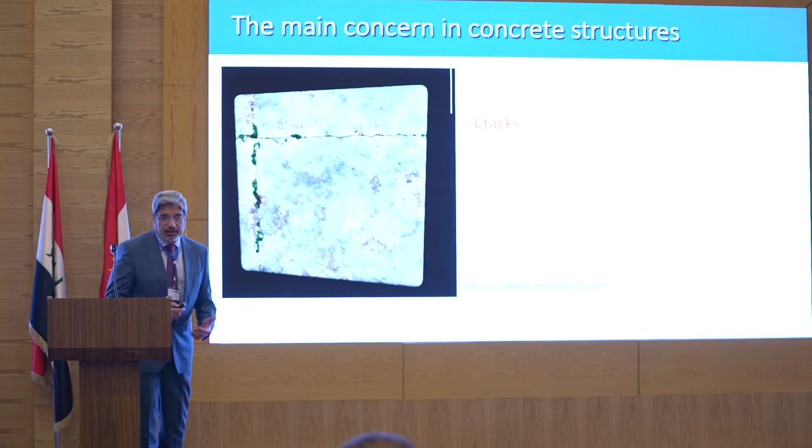I will talk about a code. It's not well known like the ACI 318. It is the 350. Why we need such code, especially in Iraq, when building our infrastructure facilities? Maybe most of you are engineers and dealing with concrete as designers or constructors and so on. Always there is a concern, which is cracks.

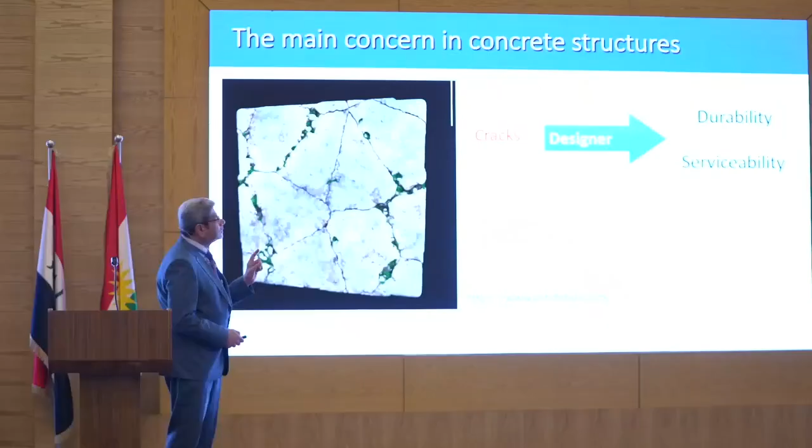Cracks are important to be controlled for the designer to satisfy two requirements: the serviceability requirements and durability requirements. And this is for ordinary buildings. But for environmental engineering concrete structures, the function will be how to keep the liquids and water, etc., inside those types of structures. So the cracks will be effective for the function.

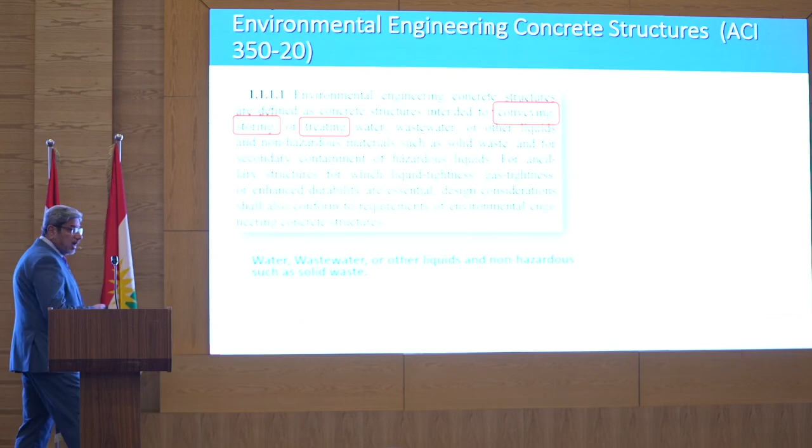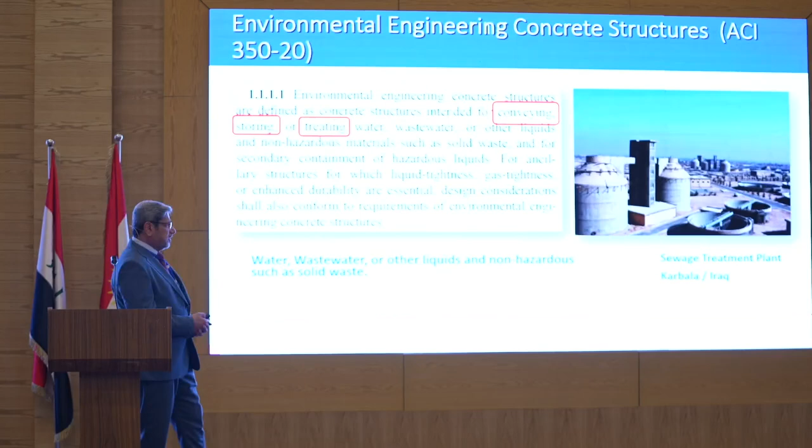But let me define first the meaning of environmental engineering concrete structures. I will use section 1.1.1 from 350-20. It is those facilities used for conveying, storing, treating water, wastewater, or other liquids, and so on. One of the examples is this treatment plant, which was constructed recently in Karbala, and I think there are a lot of such facilities in the Kurdistan region.

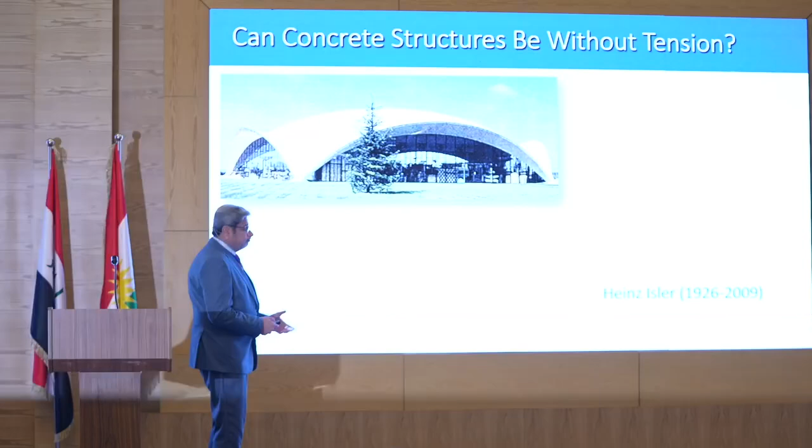So let me return back to the history and our traditions, because I also have interest in cultural heritage. So can we get rid of the tension? Because cracking is always caused by tension. There are a lot of attempts to have structures without tension. One of them, this Swiss structural designer, who passed away in 2009, started to invent such non-tension structures.

And we returned back to the history and found that the first sketches of Isler were maybe inspired by the Ctesiphon in the middle of Iraq, and the large catenary shell, which is maybe the largest catenary shell in the world, the same shape with a minimum potential energy, as you know.

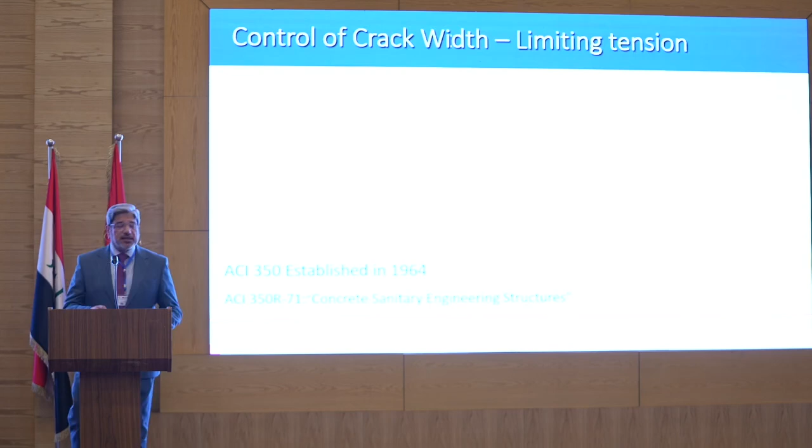So ACI started to deal with such concrete structures, but the name at the beginning was sanitary engineering structures. And the first report was published in 1971, after many years of work. The main idea is how to control the cracks, because we cannot have no-tension structures, so cracks always exist. The alternative way is to control the crack, which means limiting the width of cracks.

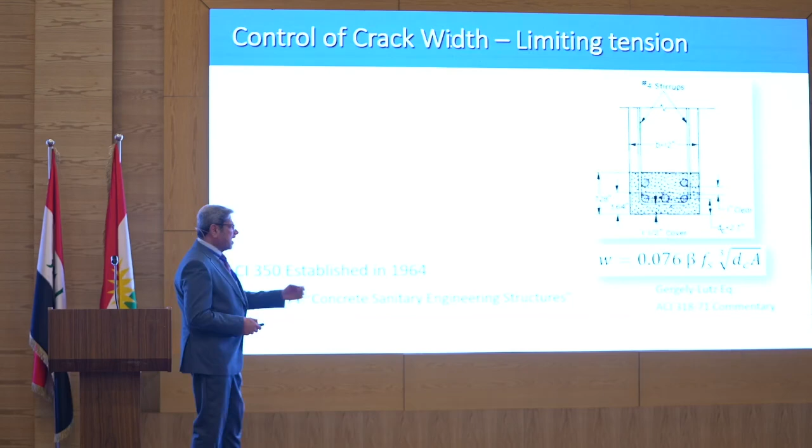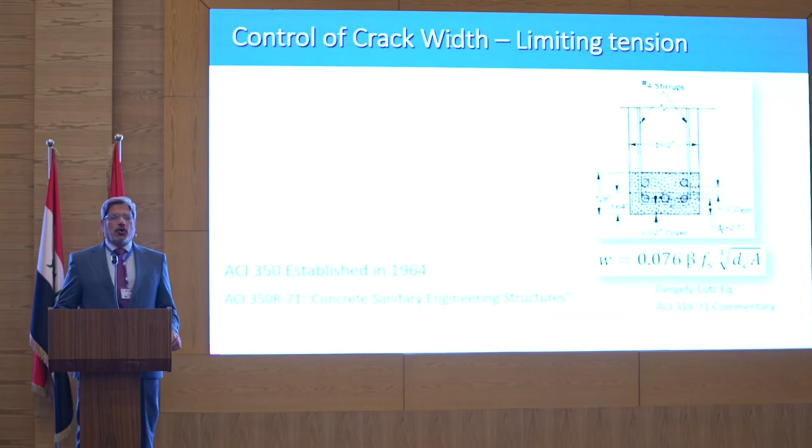The well-known equation of crack width, which is Gergely-Lutz, used by ACI 318 in 1971, was adopted in this report, and you can see there is a direct relation between W, which means the crack width, and the steel stress. Because as you know, we bring the steel to resist the tensile stresses inside concrete structures. And the working stress method was used by the report, because maybe it was the first time in ACI 318 to use strength design, so it was not adopted by this report.

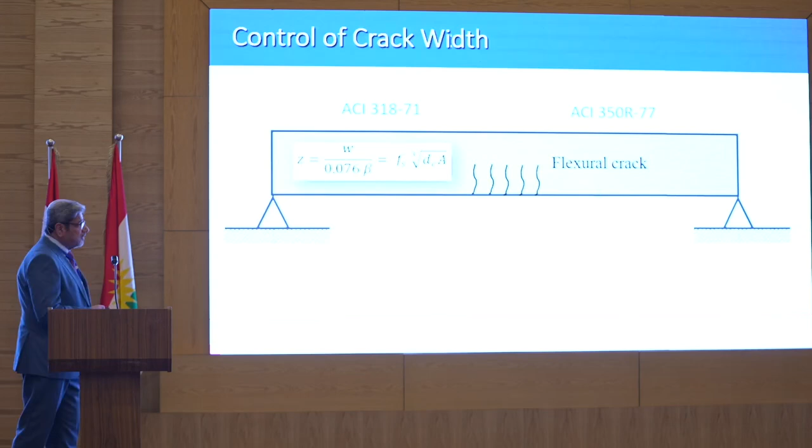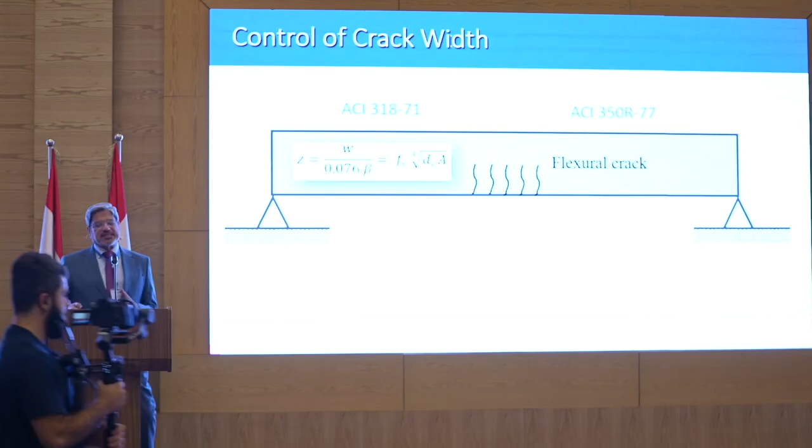Later, before talking about the other report of 1989, in '77 this Gergely-Lutz equation was adopted by ACI 350, and we will compare the difference between crack control in ordinary concrete structures and, I can say, sanitary concrete structures.

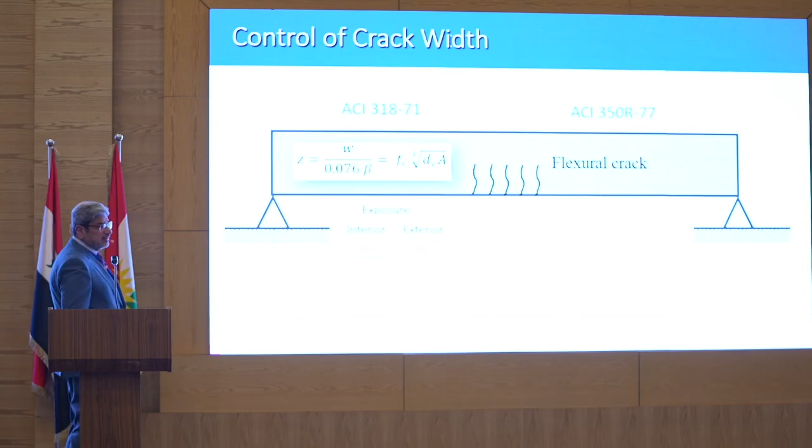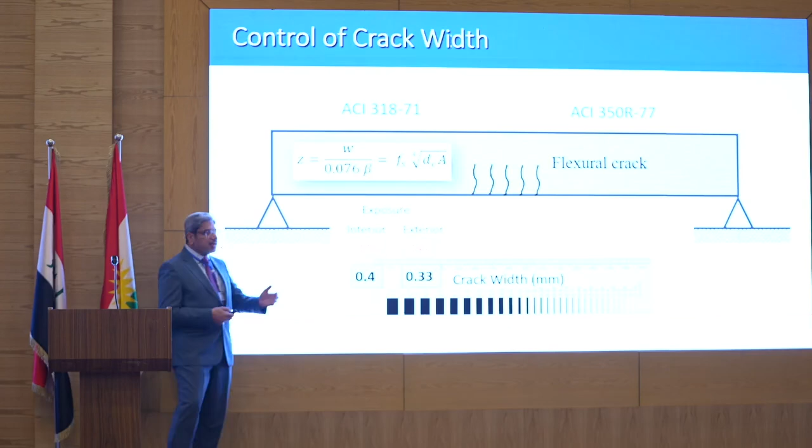So if we now take ACI 318 of 1971, we have two exposures in crack control, interior or exterior, and then we have the Z factor, not directly dealing with the width of the crack with the W parameter. For interior, the limit value is 175, and for exterior it is 145, which means if we measure the crack width by crackometer, the maximum crack width allowed is 0.4 millimeter for interior, like columns and beams in the interior space, and for exterior structural members it will be 0.33.

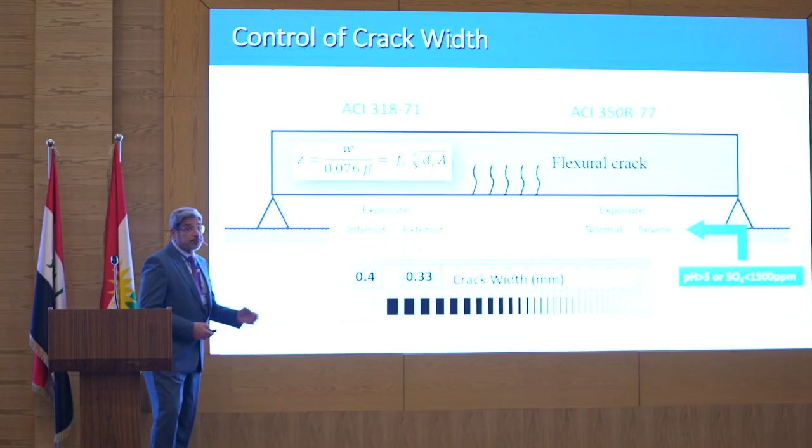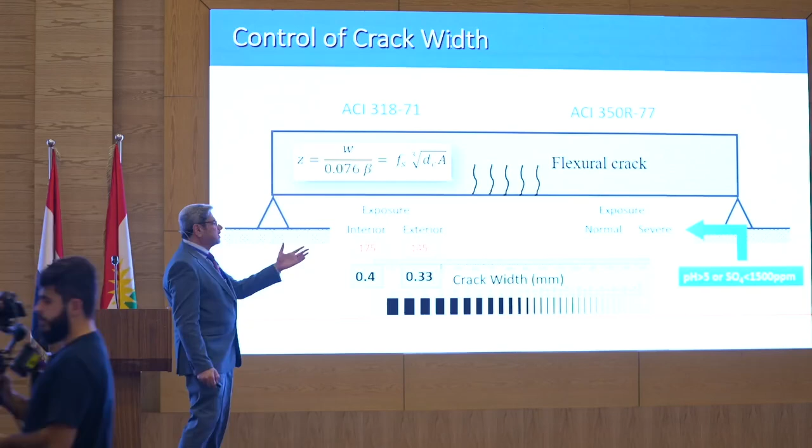But for sanitary engineering structures, the thing is different, because the exposure is not interior and exterior. It's not as simple as that. It is normal and severe. The way to measure the difference between normal and severe exposure is related to the concentration of sulfate inside the material contained in such structures, for example sewage or raw water, and so on. Or use the pH parameter to see if it's alkaline material or not.

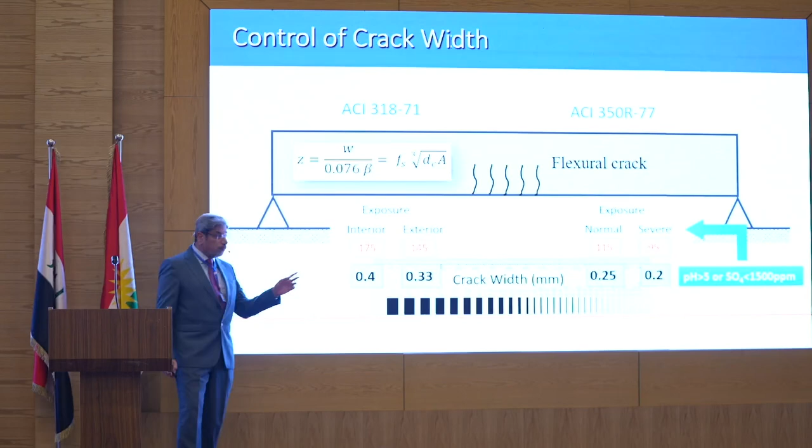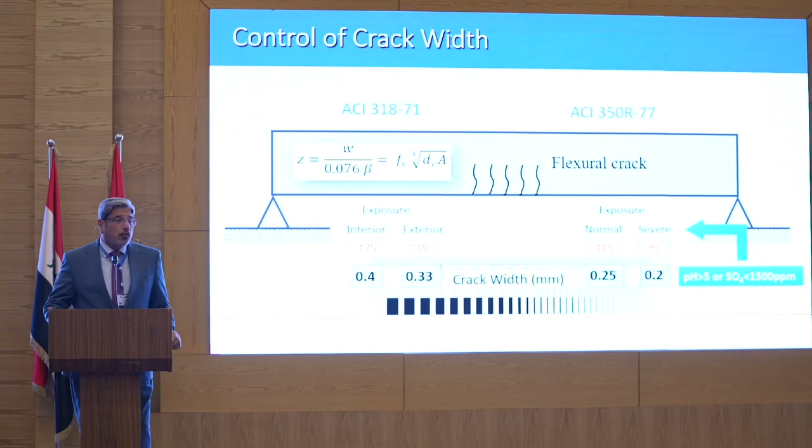So let us compare the values. We will see that the crack width is limited to 0.25 in normal exposure, and only 0.2 millimeter in severe exposure. Let us now imagine what the steel stress will be, because as I said in the beginning, we cannot avoid tensile stresses, so let us limit these stresses. As you know, the tensile stress will be carried by the steel only. So the steel stress will be 0.6 Fy here, but for sanitary engineering structures it will be limited to 0.3 to 0.45, depending on the type of exposure.

Later, another report was published in 1983, and it was time to adopt the strength design method, because we had 10 or more than 10 years since the ACI 318 adopted such philosophy in the design. This is the main equation of the strength design method.

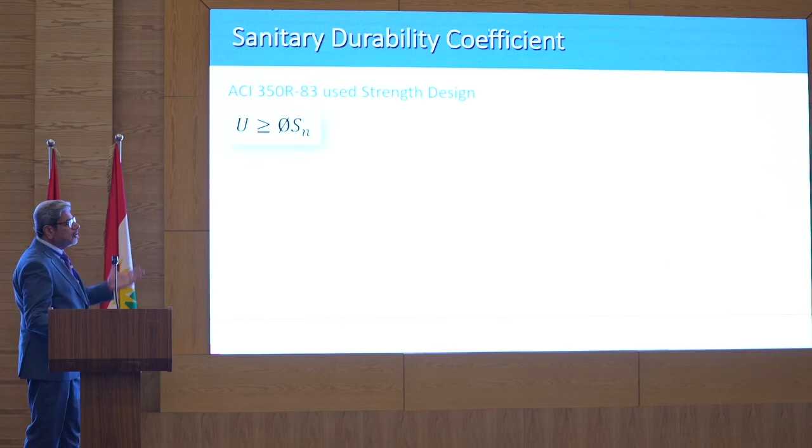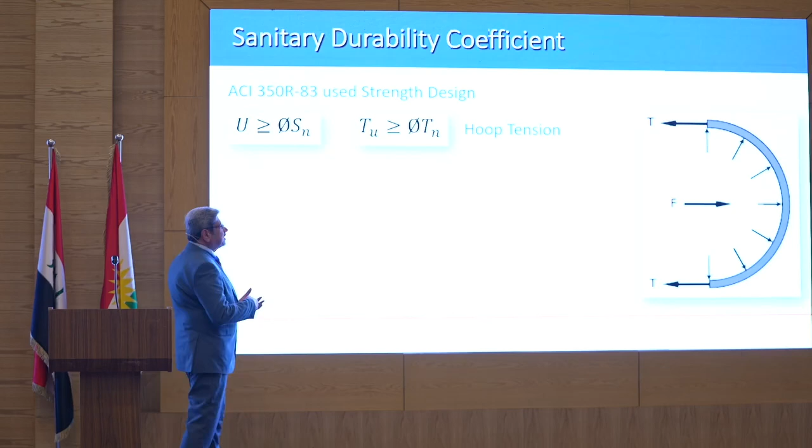If you think about how this report is familiar with the same philosophy of controlling stresses or tensile stresses inside the structures and then limiting the crack width, they used to equalize the two forces calculated by ultimate and service load, or the allowable stress method. Let us explain this in an easy way.

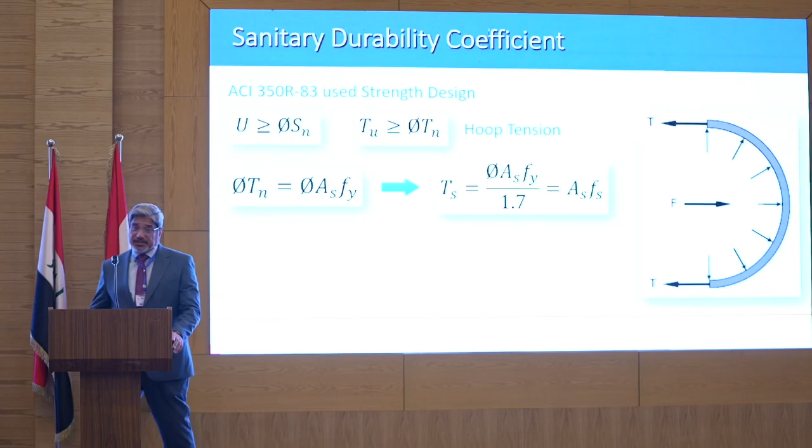Consider this circular tank. As you know, the main dominating factor in the design here will be the hoop tension, T. If we use the ultimate strength method, it will be this equation. If we use the allowable stress method and equalize both forces, we find this equation. Now consider one of the exposures, where the crack width is limited to 0.2 millimeter in severe exposure, and we will see that both equations are not equal.

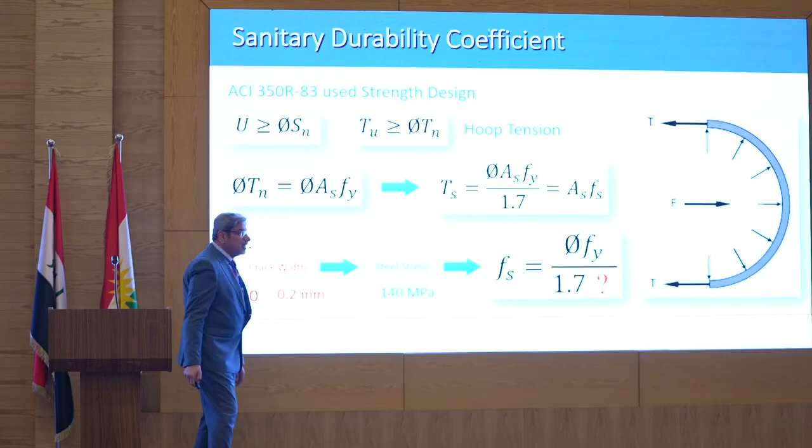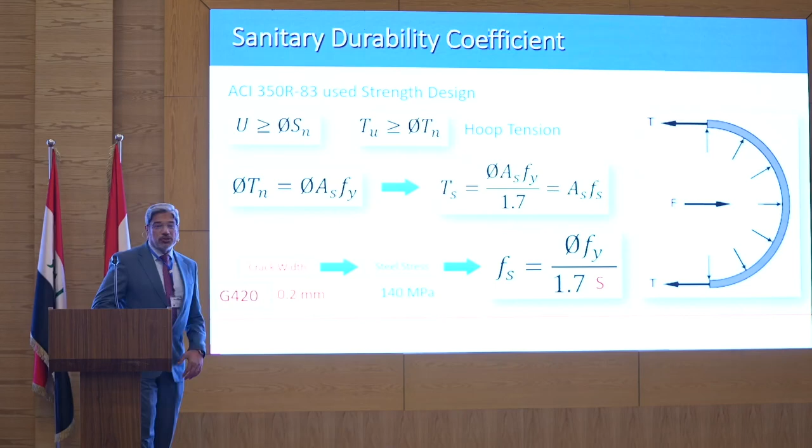We need another parameter to equalize those equations. This parameter was named the sanitary durability factor at that time. In other words, we should increase the loads more to have less stresses, and then less crack widths. This is the main idea.

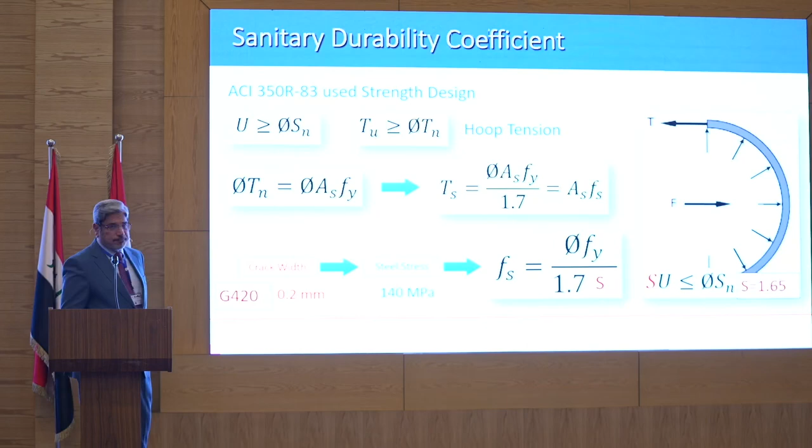This report at that time used a constant value for this durability factor. For example, for hoop tension or direct tension, it was 1.65. Later, for flexure, the same idea applied but with another equation. I have no time to go into it.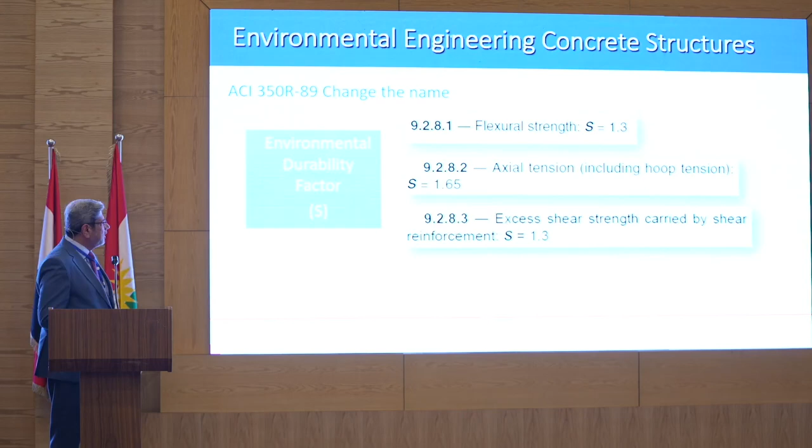But in the report published in 1989, this factor changed its name from sanitary durability factor to environmental durability factor. This is because the whole report title was changed from Sanitary Engineering Concrete Structures to Environmental Engineering Concrete Structures.

As you can see, it is clear that the constant value for this factor was still adopted at that time, because this idea was developed in another way.

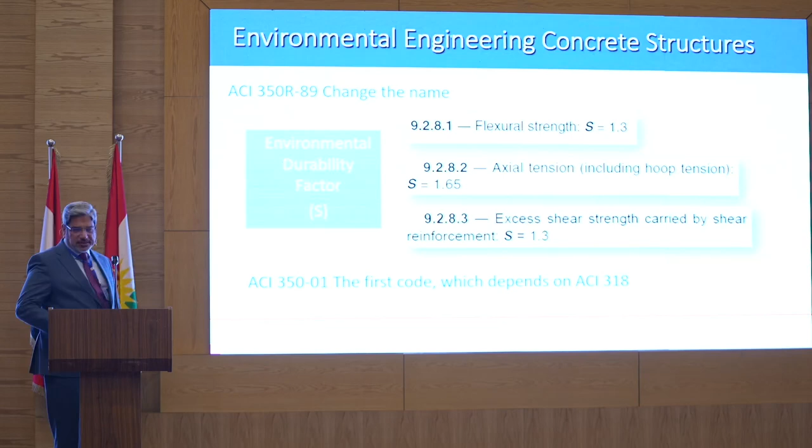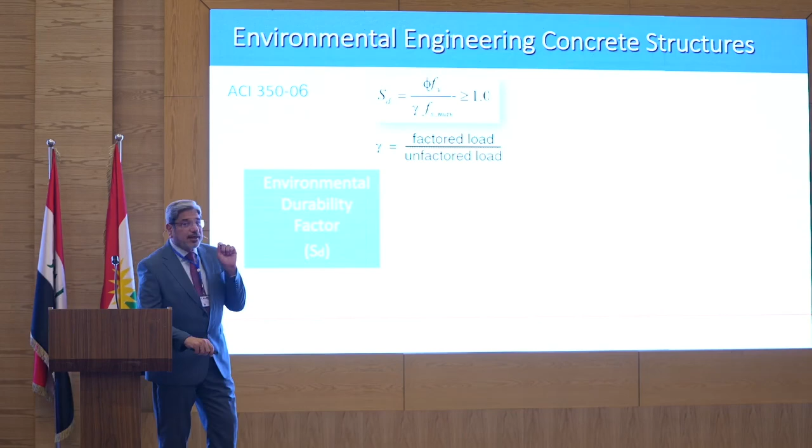The first code in this new millennium was published in 2001, with the name ACI 350. Later there was a code in 2006, but the main common idea between them is that the durability factor was calculated by an equation, not constant values. This equation has many parameters, like phi and f sub y and so on, but the main parameter, I would say, is the maximum steel stress, which defines the maximum crack width allowed in the design.

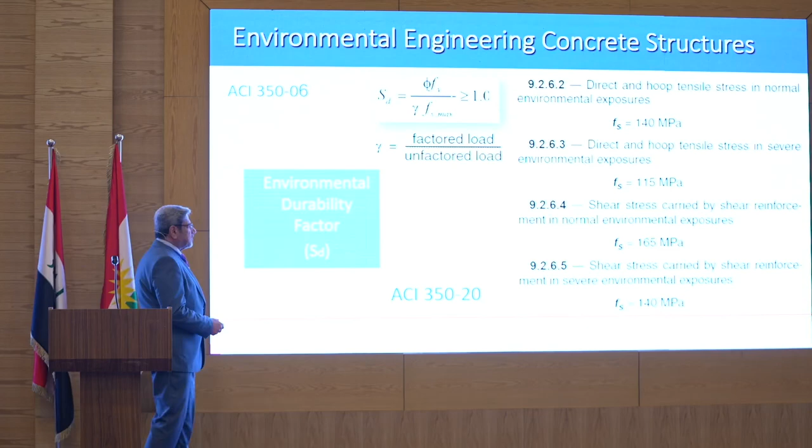Constant values are used for hoop tension, but for flexure we see other values and another way to calculate this. The code published recently in 2020 adopted the same values and the same equation with the same symbols, but for flexure, you can see there's been a lot of change. It is a huge change in adopting the main philosophy of how to control or calculate the crack width.

In the beginning, as I mentioned, the code or report adopted the Gergely-Lutz equation. But when ACI 318 moved to another equation, written or published by Frosch, I think in the late 90s, the code ACI 350 also followed this new idea and equation.

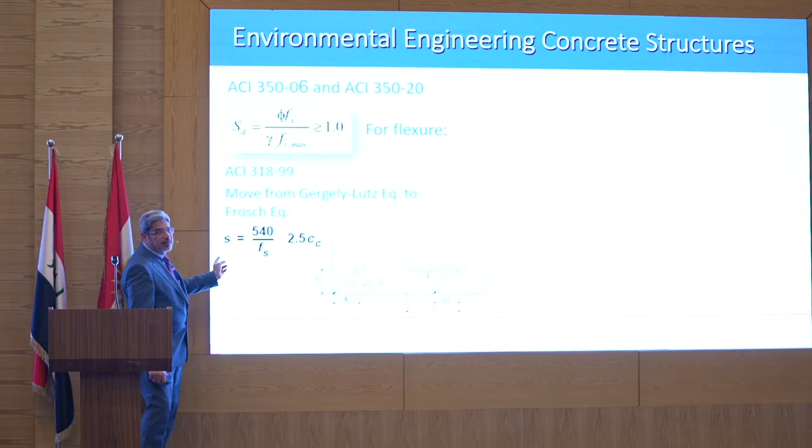I think all the engineers who graduated earlier studied the Z factor, but new engineers now study only the maximum spacing in the ACI code, how to calculate maximum spacing between bars to control flexural cracking. However, the FS max now has new equations dependent on the Frosch equation.

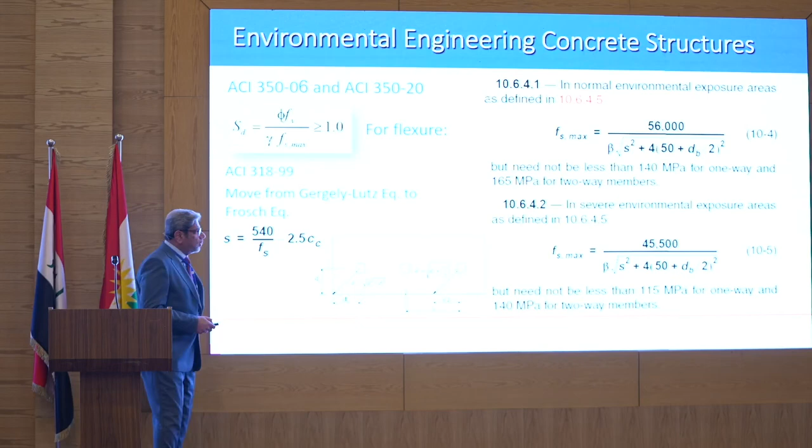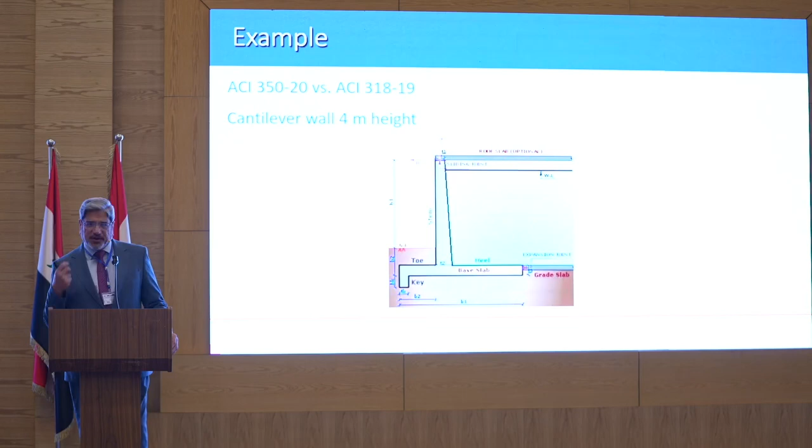To show you the difference in engineering sense, we are engineers, we want to deal with numbers, and the output is very important for us. Let me consider now an example, a virtual example.

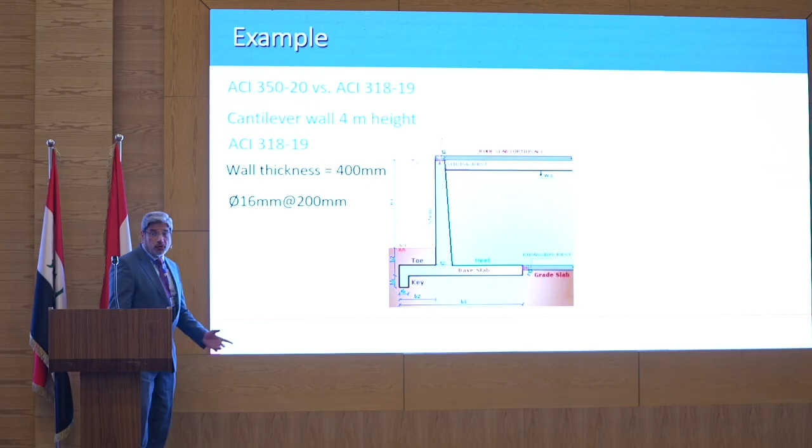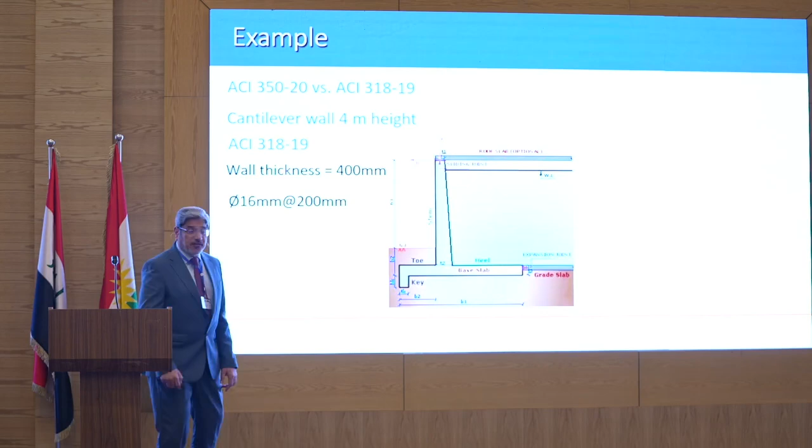We have a water tank designed as a cantilever with a fixed base. I will use ACI 318 to design this cantilever wall of the tank. The wall thickness will be 400 millimeters, reinforced with bars of 16 millimeters each, spaced at 200 millimeters. But if we think about durability, function, water tightness, and so on, we should use ACI 350, and you will find these results.

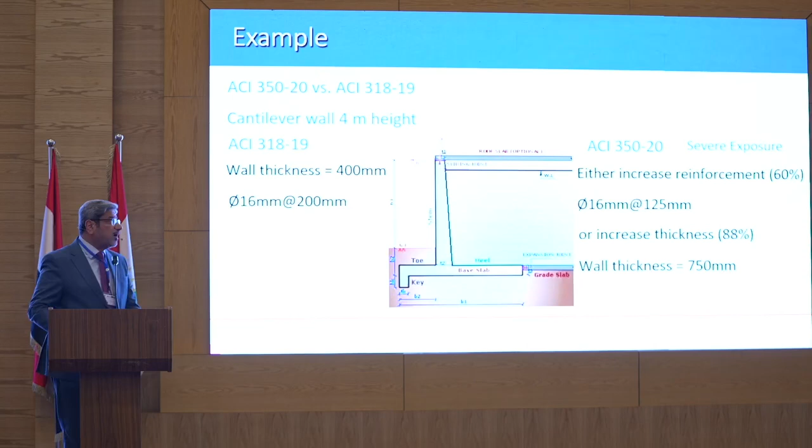So to control crack width, you have to increase the wall thickness by 88%, or you have to increase the reinforcement by 60%. This is the difference between ACI 318 and ACI 350.

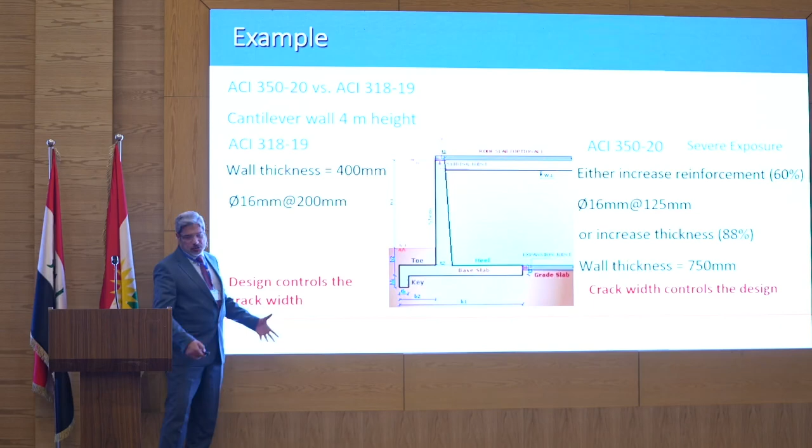So I can say, this is my own sentence, not from the code, that in ordinary design, the design controls the crack width. This is familiar, a common sentence. But I can add that the crack width will control the whole design in this type of structures.

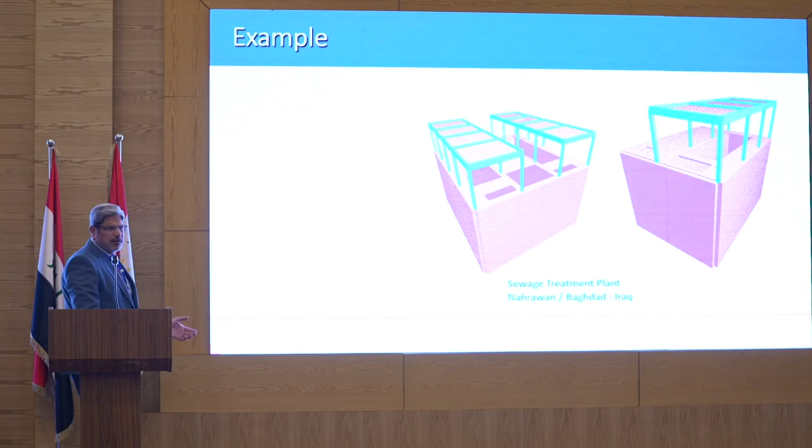Recently, one month ago, I checked the design of some facilities in a pumping station at Nahrawan, a treatment plant at Baghdad. Those facilities were designed, I think, in 2014 using the old ACI 350. But I used the new ACI 350 to find if the design is good or not, or must be checked. I found this.

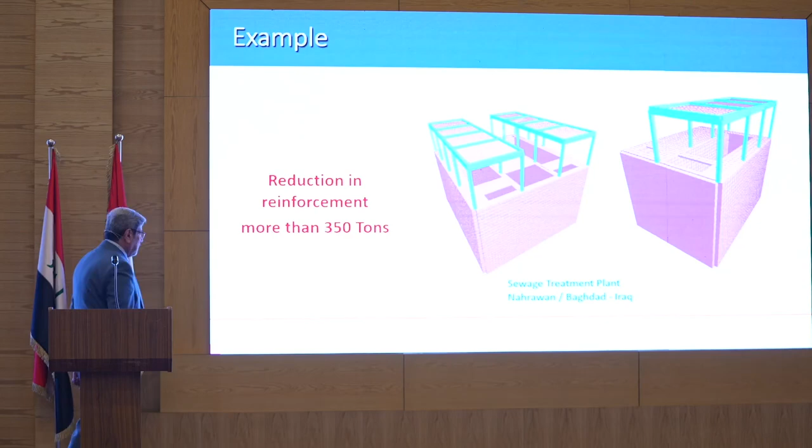When I use the new ACI 350, there's a reduction in the reinforcement of about 350 tons, which made some problems between the contractor and the client, because there will be change orders about the price and the contract and so on. But this is a strange thing. Why is the reinforcement reduced in those pumping stations?

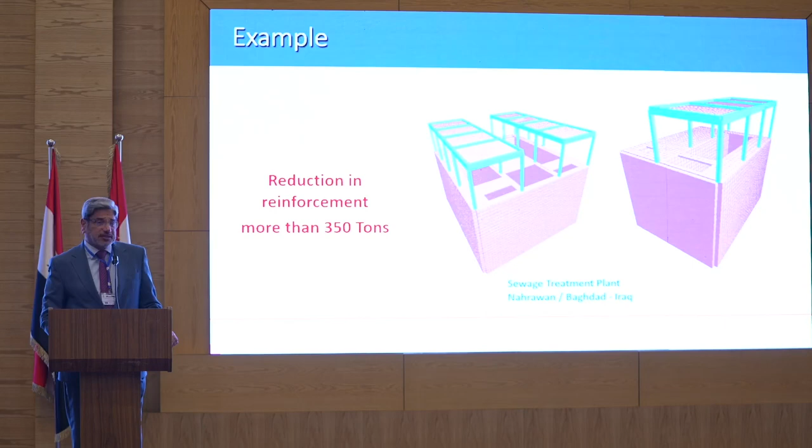I will tell you. Up to now I was talking about one type of cracks, the flexural crack. But we have another type of cracks which is very important: the shrinkage and temperature cracks. Yes, it happens at early ages of concrete, but really it's a bad thing for everyone dealing with concrete - the contractor, the designer, the client, and so on.

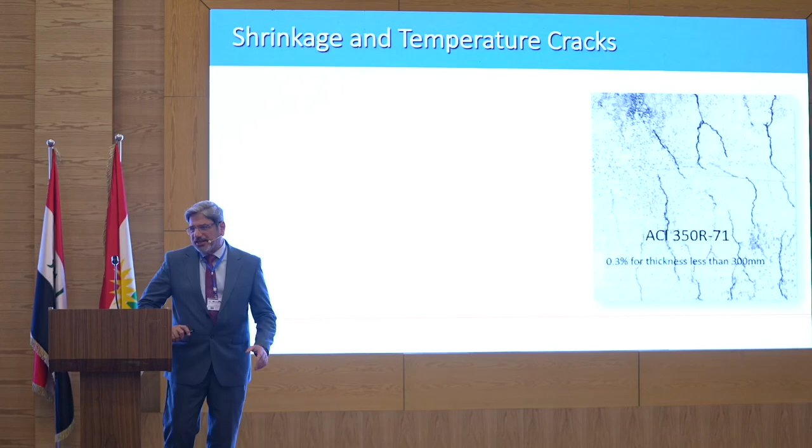When, after removing the shoring and the forming, they saw a lot of cracks, crazy cracks, as they mentioned.

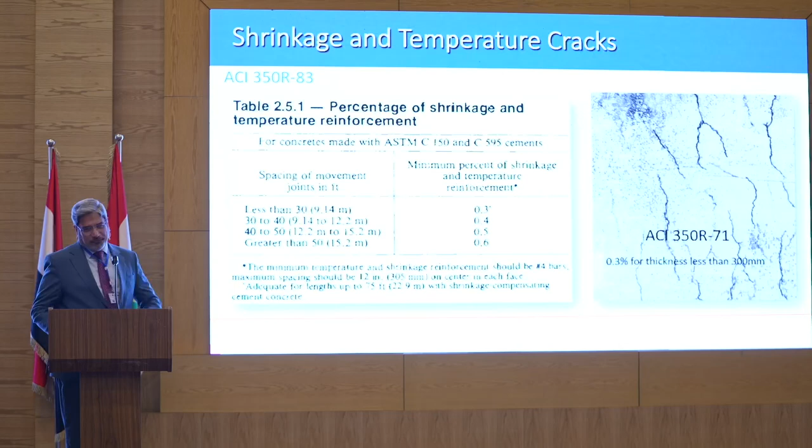At the beginning, the ACI 350 reports used those ratios as a minimum. We called it minimum reinforcement - for simplicity I will call it minimum reinforcement, to avoid shrinkage and temperature cracks. So the maximum is 0.006 and the minimum is 0.003, and the minimum of this table is larger than the minimum in ordinary walls, which is 0.0025.

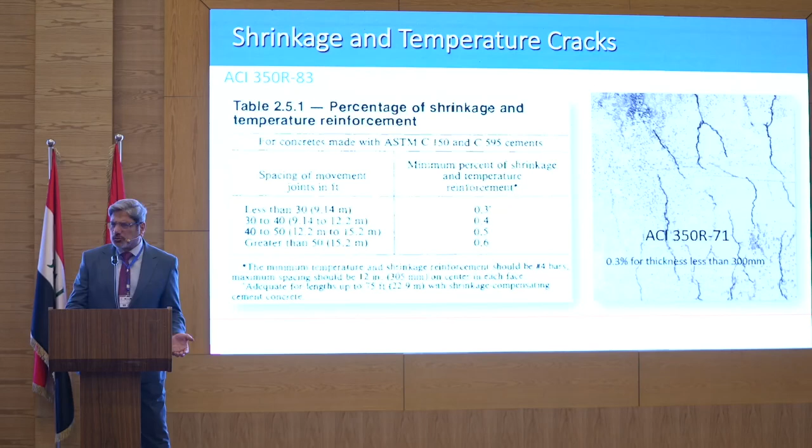Later, this was improved in another graph and so on, and in the report they added sketches for the contraction joints, because it is important to control the shrinkage crack not only by reinforcement, but also by using contraction joints, as you know.

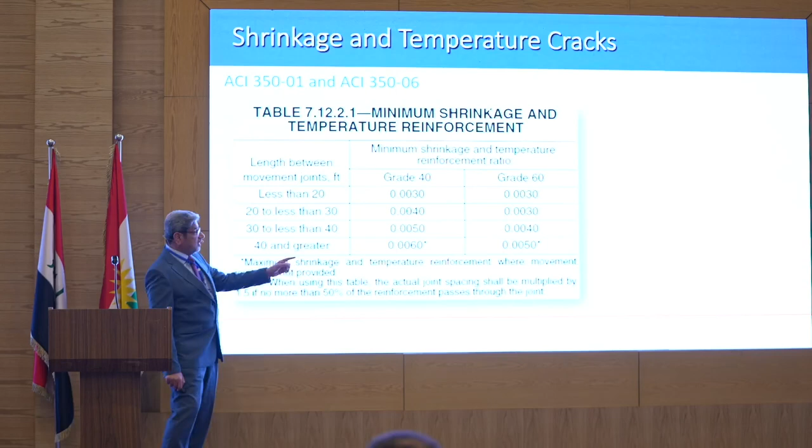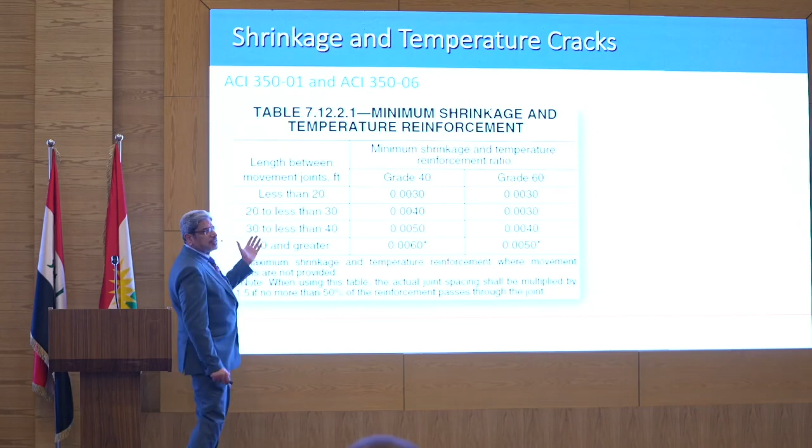The code, or the last code before the recent code, let me say like that - now there are two types of steel reinforcement, grade 40 and grade 60, and you can see that the maximum secondary reinforcement is 0.006, but it depends on the distance between the contraction joints.

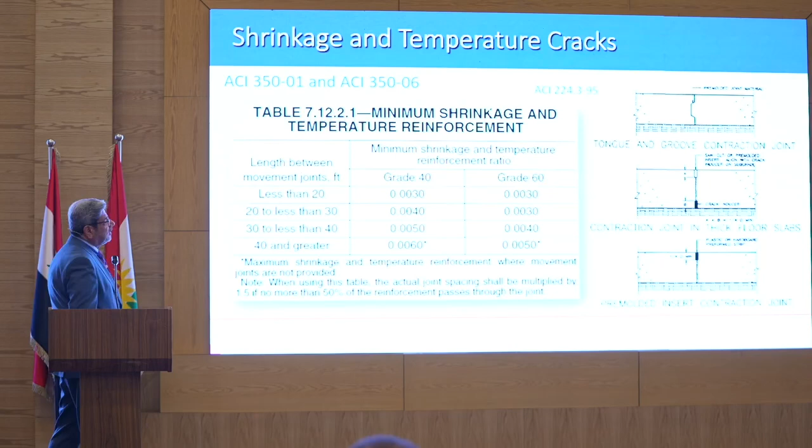One of the major changes in the recent code of 350 is that it uses another way to control cracking by reinforcement and contraction joints at the same time. There is a new parameter, which is restraint.

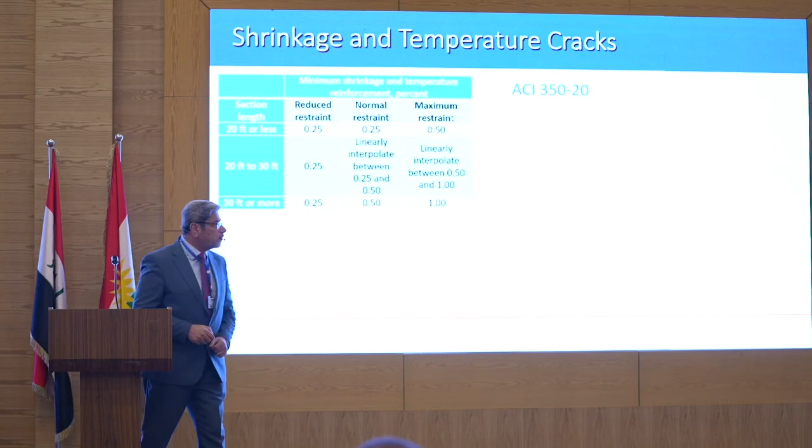As you know, cracking happens because of shrinkage and temperature when there is restraint to the movement. If the movement is not restrained, there are no cracks. So the code defines three types of restraint depending on the position of the reinforcement and the position of the stresses. I will show you one example.

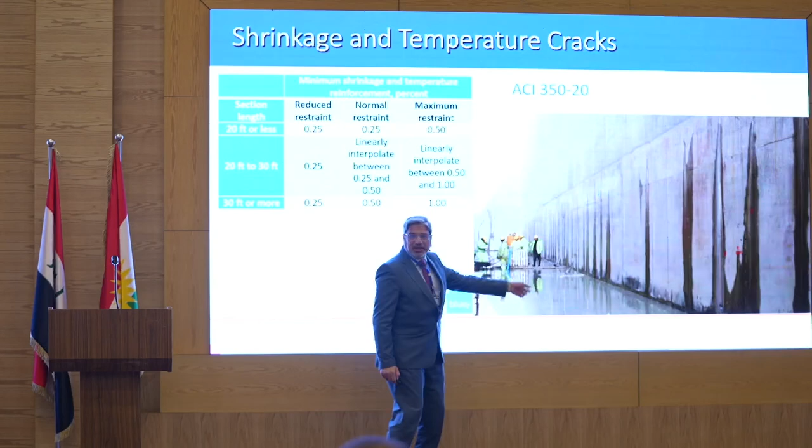Let us imagine this wall. It is a real photo, and you can see clearly where the cracks begin and then propagate. So the code says that the ratio of reinforcement should be 0.01, which is much larger than the maximum 0.006 we saw in the previous slides.

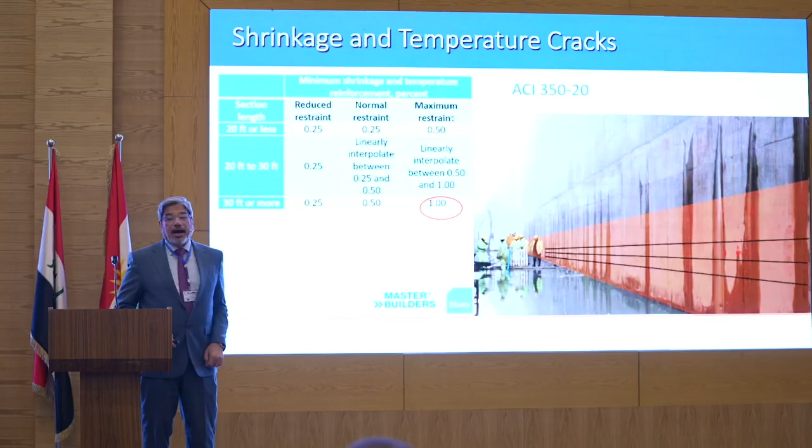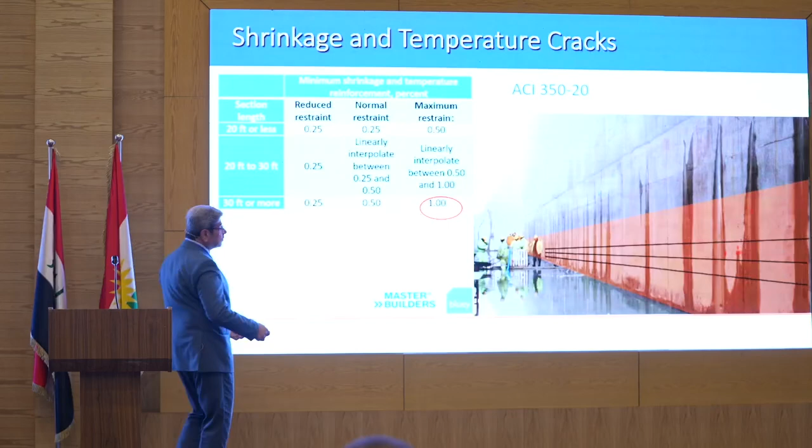But where? At this strip, 1.8 meters above the bottom of the wall only, and in the horizontal direction. So this is the highest risk region in the wall. But there's no need to use this ratio for the whole wall and for both faces.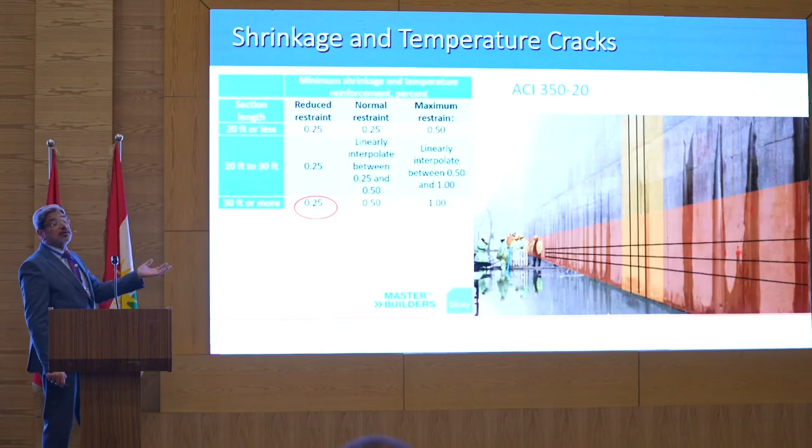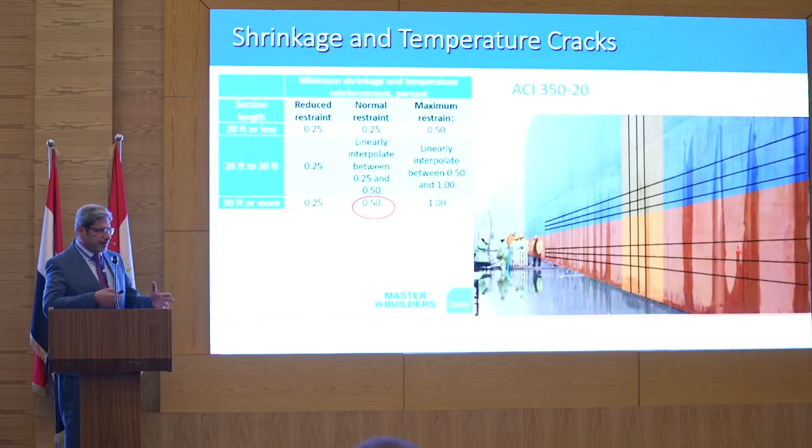For this, you can, for example, define a reduced restraint region, only 0.0025, which is less than 0.003, the minimum of the previous code. And then you can use normal restraint for the other positions of the wall. This is the reason why the amount of reinforcement was reduced by about 350 tons - I don't know the percentage within the whole project.

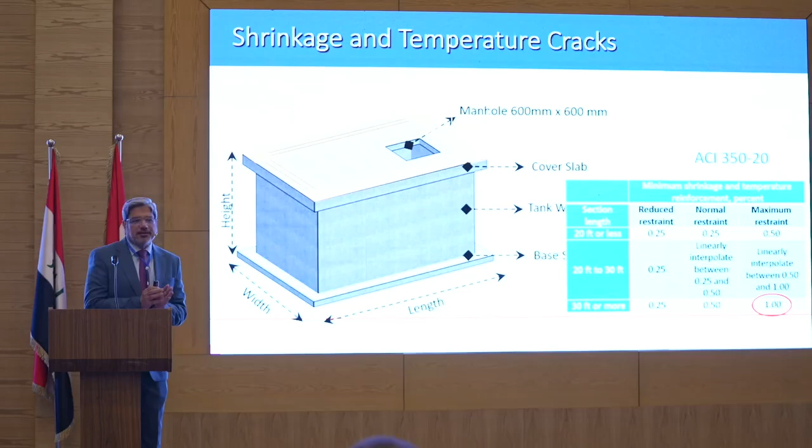Also regarding the slab, the reinforcement can be 0.005 or 0.01 depending on the position - only in the strip which is parallel to the concrete wall, because the concrete wall will be the cause of restraining the slab, or the movement of shrinkage stresses, and so on.

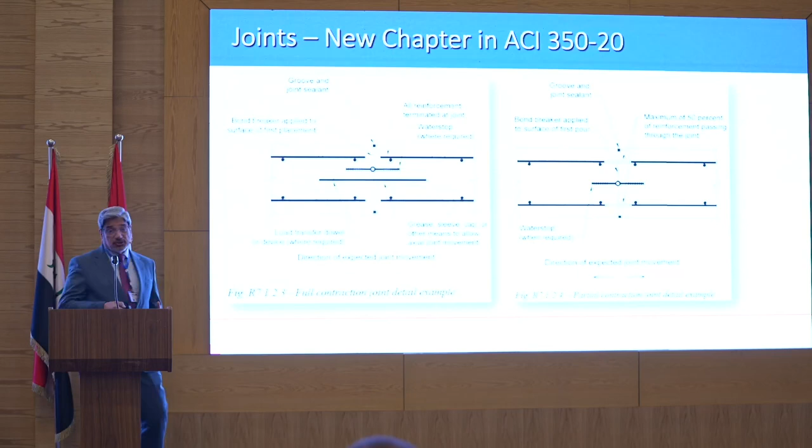And in the new code there is a new chapter, chapter 7, for joints and the details of joints. Also, I want to mention that the durability requirements in such types of structures are very important. How many minutes do I have? Oh yes, let me be fast.

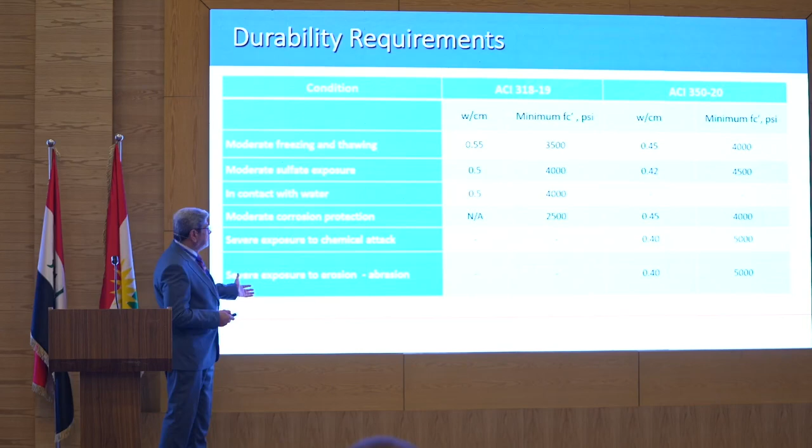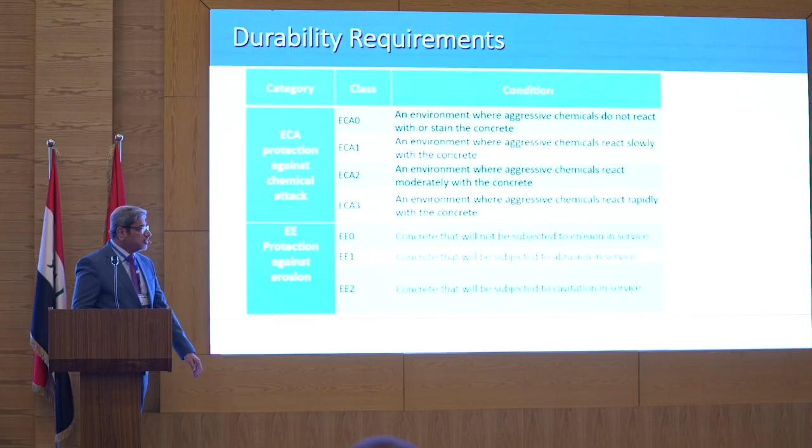There are also new types of exposure in such structures, related to ACI 318, with more restricted requirements, and also protections against chemical attack.

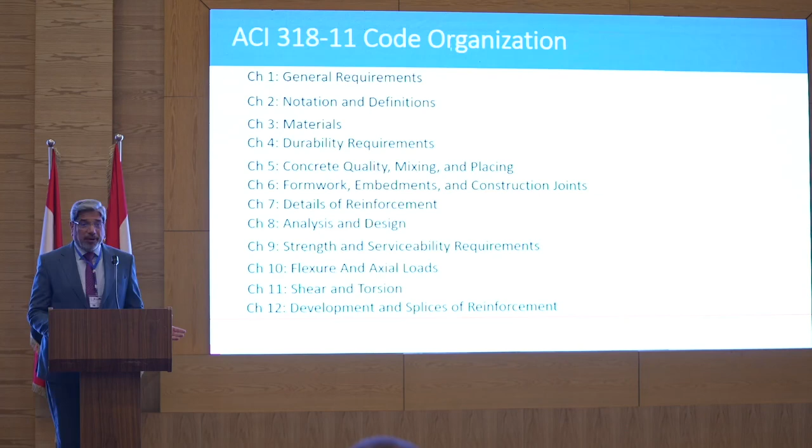And finally, let me briefly explore the arrangement of this new code compared to the old code. You can see that new chapters were added to this code, and the code, in the beginning and still up to date, is based on ACI 318 in its organization - but the old ACI 318, not the new organized ACI 318. So this is ACI 318-11.

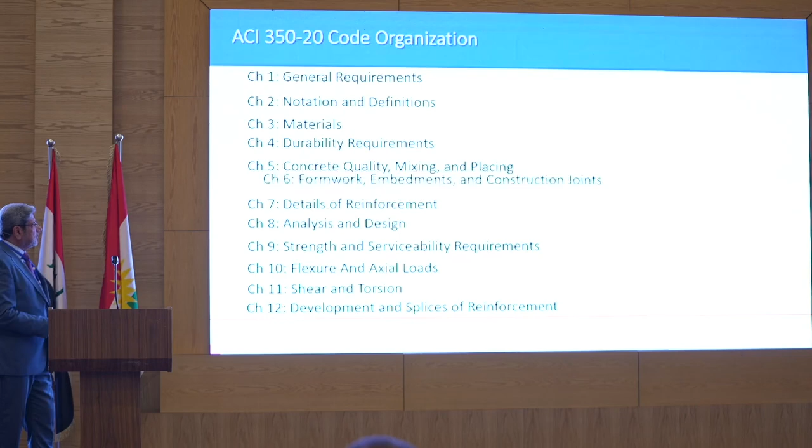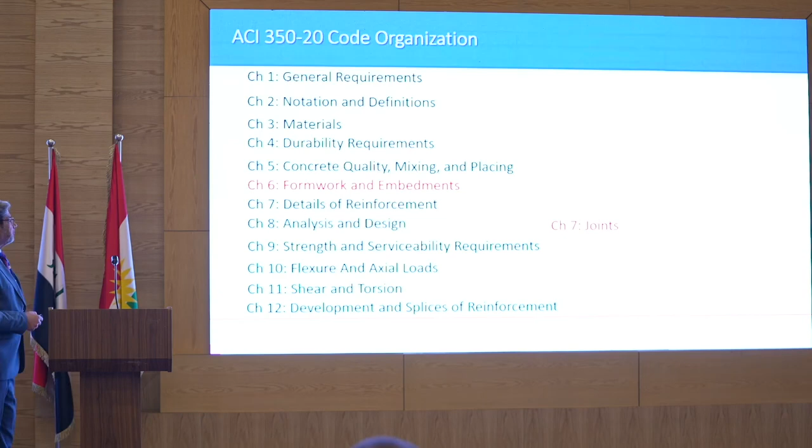You will now see the change in the chapters and the organization: a new chapter on formwork and embedment, development length, and other reinforcement details was moved to chapter 12, and the new chapter about joints is chapter 7. So the details of reinforcement, as I mentioned, was part of chapter 12.

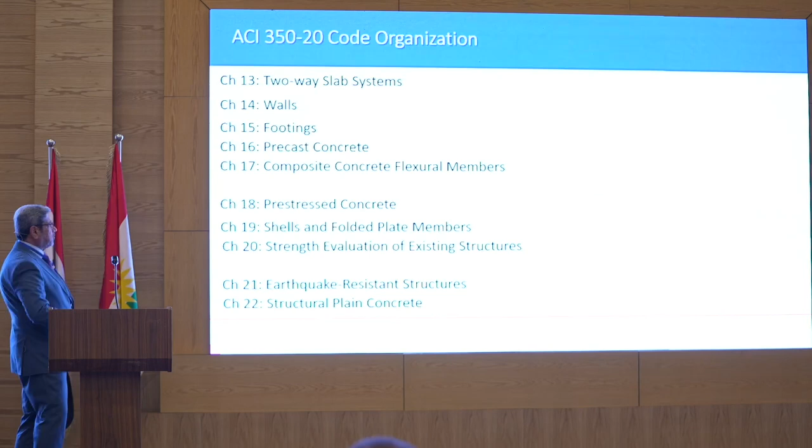The other chapters also changed - chapter 21, the earthquake design of such structures, was chapter 21, moved to chapter 13, and the numbering of all the chapters was changed because of that, as you see.

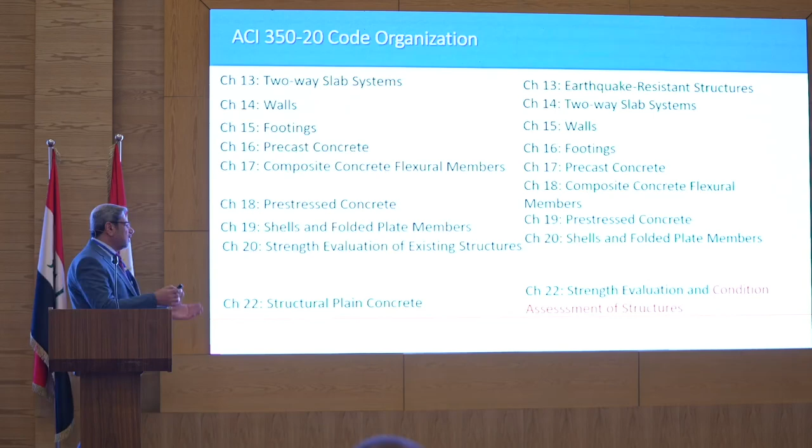And also, I think there is a new chapter, condition assessment, added as chapter 22. I hope this will not compete with ACI 562, Dr. Khalid, but it is just simple ideas on how to - I can't say repair those facilities - but just how to explore the damages and so on, how to write reports, etc. And the new chapter also regards this type of structural facilities.